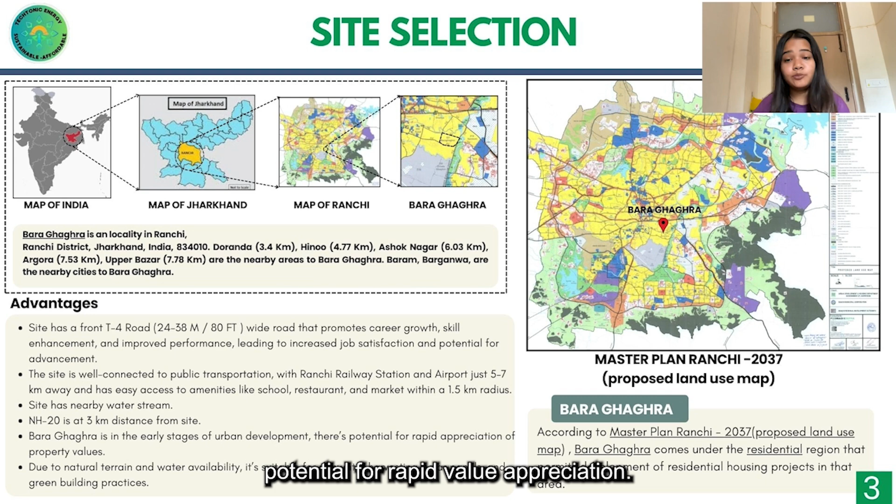While planning the community, we have also followed the bylaws of Jharkhand, ensuring that 35% of the housing is allocated to EWS, 15% to LIG, and the rest to MIG.

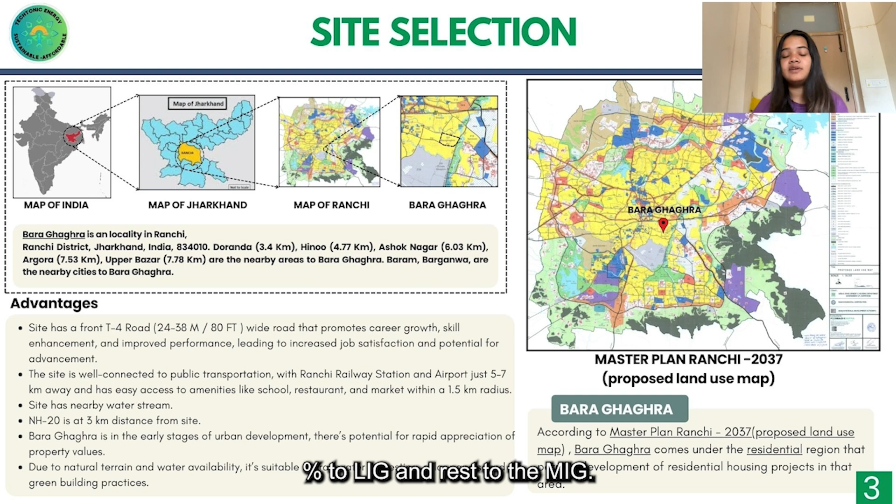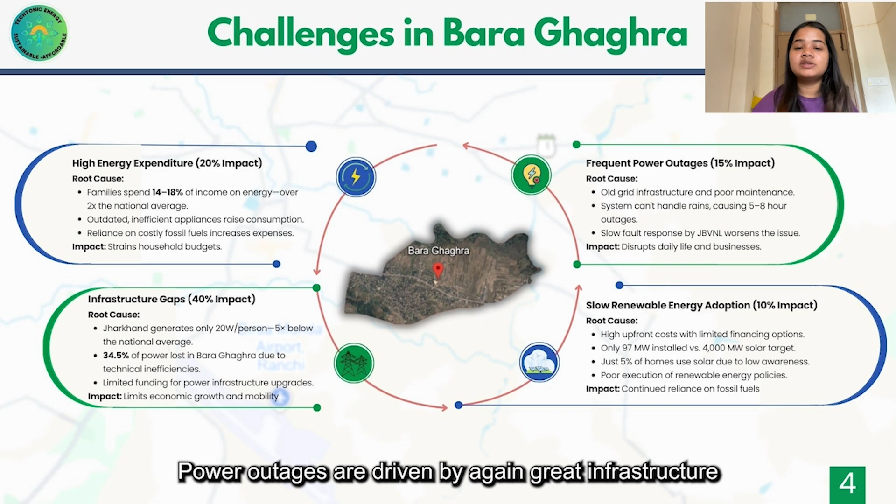Let's take a closer look at the major challenges in Bara Ghaghra. The challenges are high energy expenditure, with the root cause being inefficient energy usage and outdated appliances. Power outages are driven by grid infrastructure and technical faults. Infrastructure gaps are caused by low power generation and high transmission losses. Slow adoption of renewable resources is due to financing hurdles and weak execution.

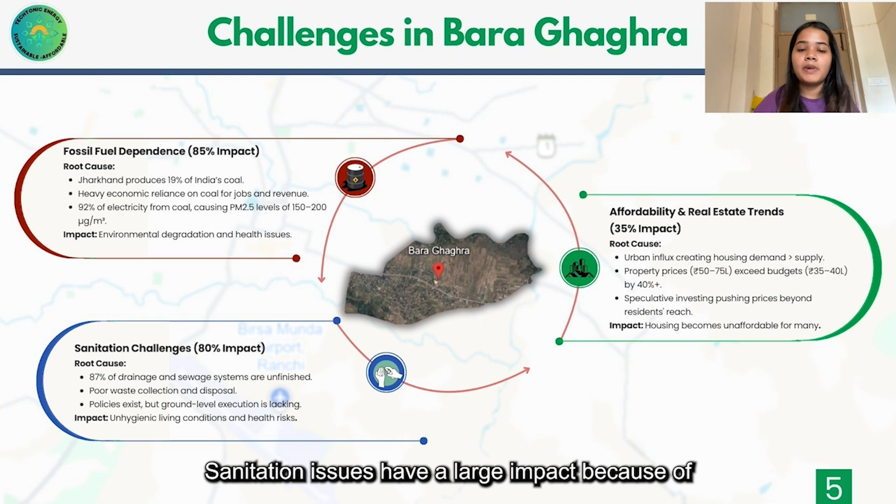Housing affordability and market trends are shaped by rapid urban growth and rising costs. Sanitation issues have a large impact because of incomplete infrastructure, poor waste systems, and failed implementation. Fossil fuel dependence remains high due to the country's coal reserves, economic reliance on them, and their environmental impact.

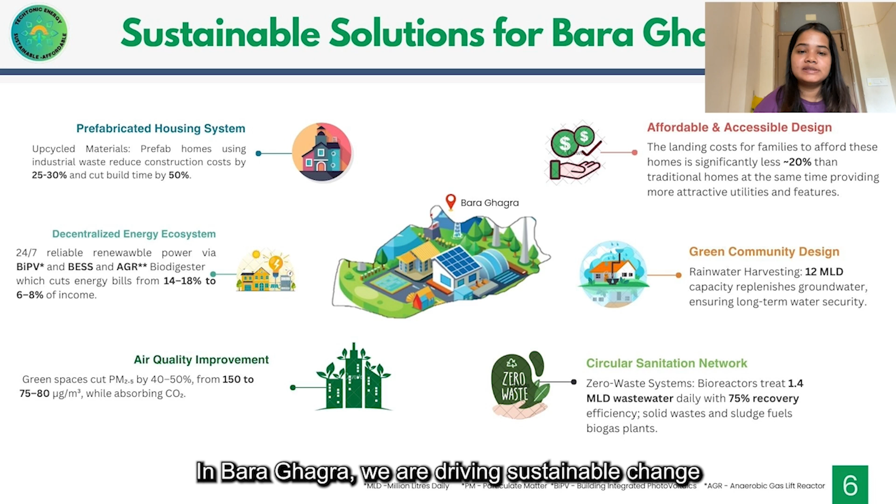In Bara Ghaghra, we are driving sustainable change with innovative solutions like prefabricated housing, affordable designing, decentralized energy system, water security, clean air, and circular sanitation.

Moving on, we have also conducted a participatory survey to understand the key needs and pain points of the people we aim to serve. Based on the insights gathered, we have identified and segmented the community into three consumer personas: EWS, LIG, and MIG. Through this division, we tailored specific solutions to meet the unique needs of each group, ensuring that their settlement requirements are addressed effectively.

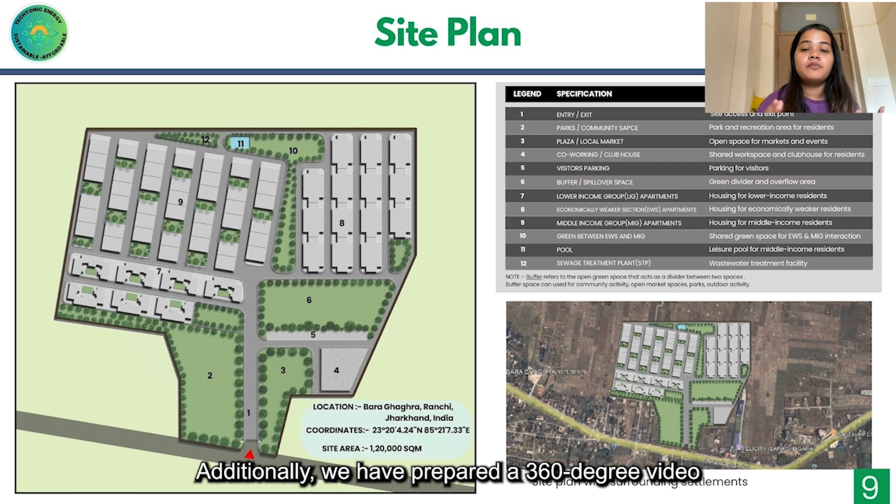Now, moving on to the site discussion. Here is the layout we have developed for our project. Additionally, we have prepared a 360-degree video to provide a comprehensive visual understanding of the site.

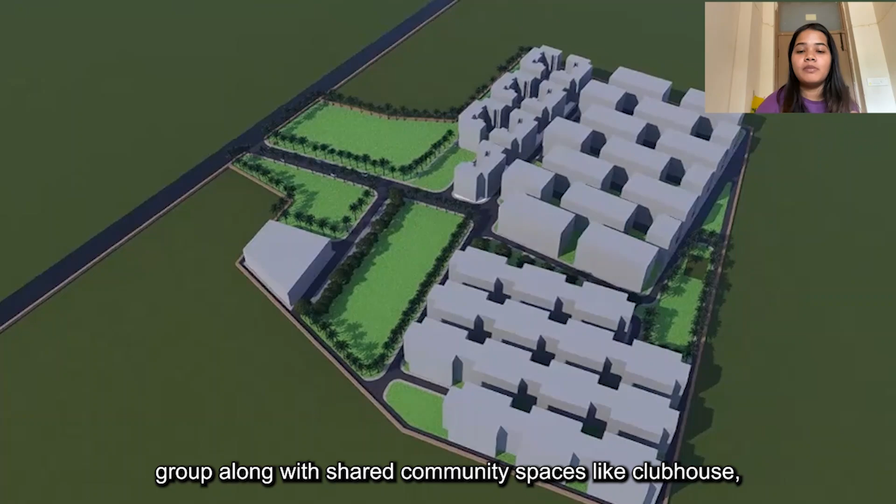In this video, as you can see, the layout includes different housing zones for each demographic group along with shared community spaces like clubhouse, local market plaza, parks to foster interaction and inclusivity, green buffers, visitor parking, and a wastewater treatment plant, ensuring both functionality and sustainability.

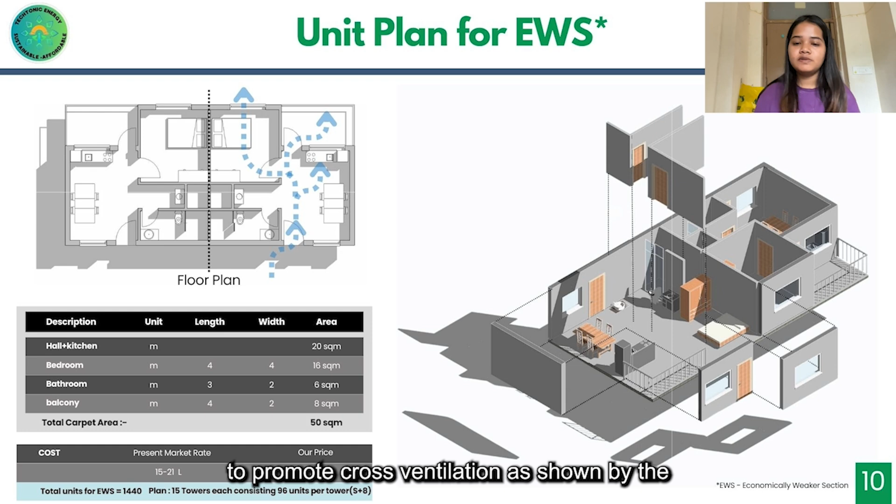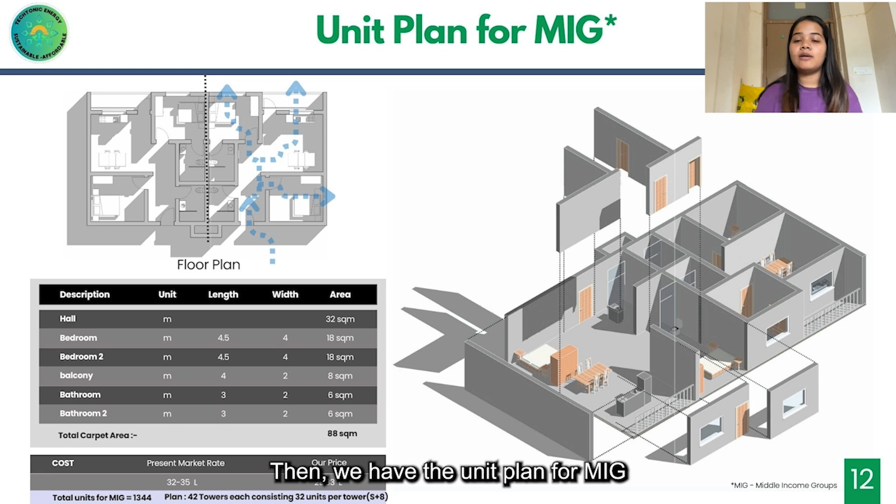Then we have the unit plan for LIG with a 1 BHK apartment but with a little more carpet area of 71 square meters. Then we have the unit plan for MIG with a 2 BHK apartment with a carpet area of 88 square meters.

Moving on to the next slide. Now, to ensure long-term sustainability, our first major step is building a smart integrated energy infrastructure for the community.

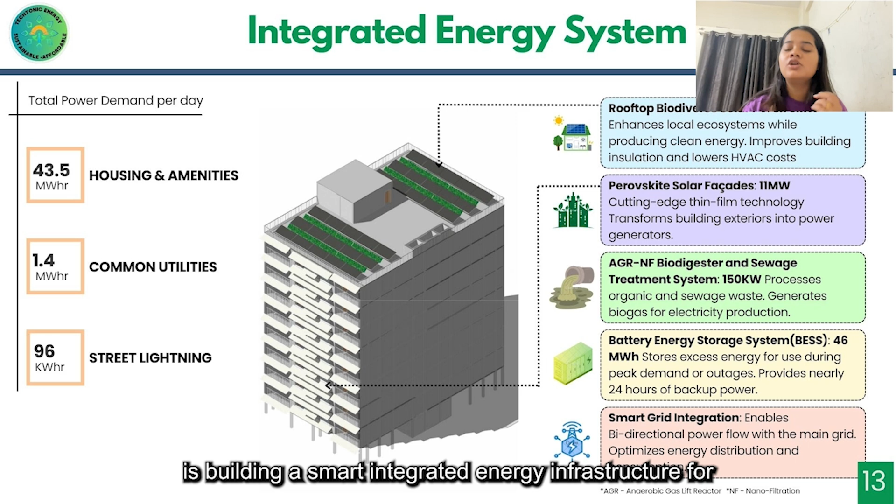Towards this step, we have incorporated a 3.75 megawatt rooftop biodiverse solar system with 11 megawatt of perovskite solar facade in the apartment, with AGR-NF biodigester to turn waste into biogas power. To enhance reliability, a 46 megawatt hour battery energy storage system stores excess energy.

To meet the community's daily sustainability needs, we have calculated a total power demand of 43.5 megawatt hour for housing and essential amenities, 1.4 megawatt hour for common utilities and services, and 96 kilowatt hour for street lighting.

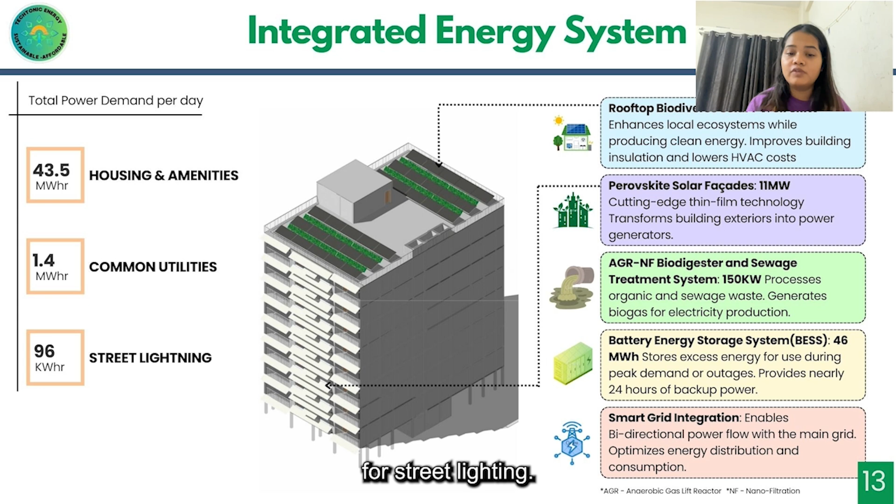Coming on to the next slide, since energy demand in Jharkhand is increasing by 5% annually, to further strengthen our community's energy resilience, we plan on harnessing future energy potential through two promising sources: coal bed methane and geothermal energy.

Jharkhand holds India's largest CBM reserve, making it a key player in the country's clean energy future. It offers lower emission, all-weather reliability and affordable energy, making it ideal for our needs.

We plan to integrate methane generators for disaster-ready backup and leverage CBM to supply 60% of electricity during monsoon, when solar output drops. In addition to CBM, we also see huge potential in geothermal energy, especially from the Surajkund region here in Jharkhand.

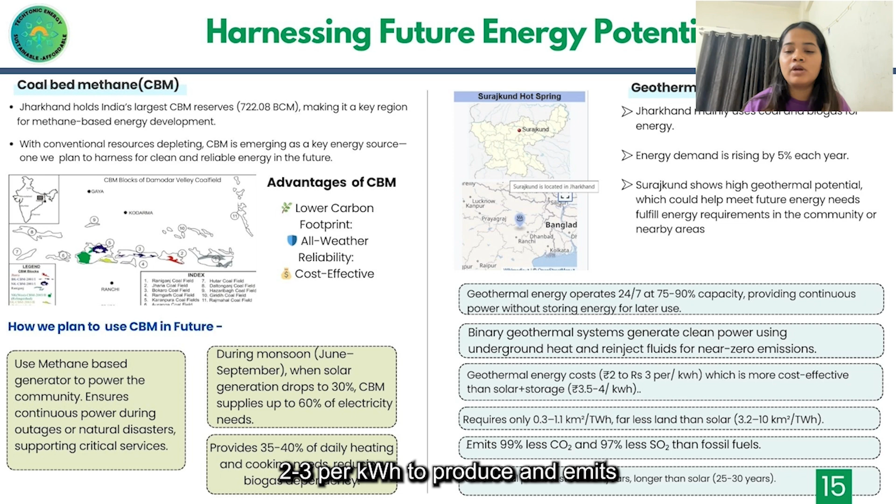Geothermal energy is a cleaner, constant power source that runs 24/7 up to 90% capacity with no storage needed. It also lasts 30 to 50 years, needs less land, costs just rupees 2 to 3 per kilowatt hour to produce, and emits 99% less CO2 than fossil fuels.

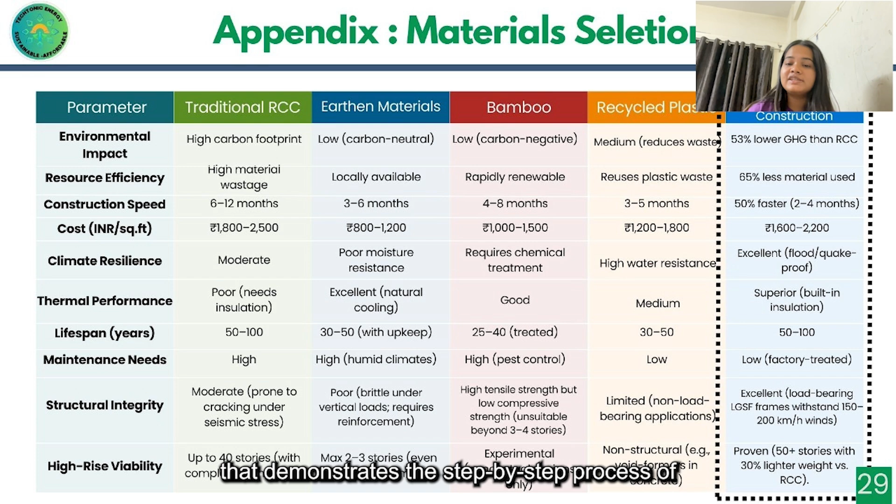Now, moving on to our next slide. After exploring various sustainable housing options, we chose prefabricated homes for their clear advantage. So now, we will be presenting a video that demonstrates the step-by-step process of how prefab homes are constructed.

This 3D volumetric concrete construction is the modern method of building by which solid precast concrete structural modules like room, toilet, kitchen, bathroom, stairs, etc., and any combination of these, are cast monolithically in a plant or casting yard under controlled conditions.

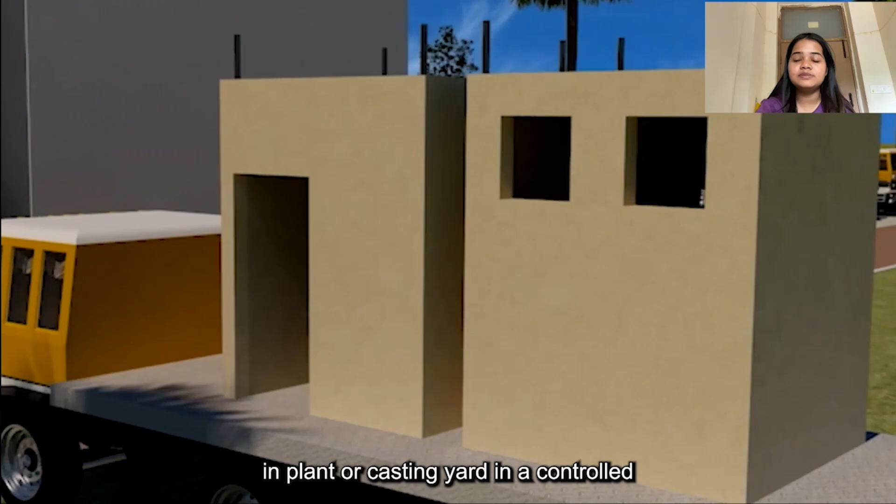These materials are then transferred by trucks and vehicles. Subject to the hoisting capacity, buildings of any height can be constructed using this technology system.

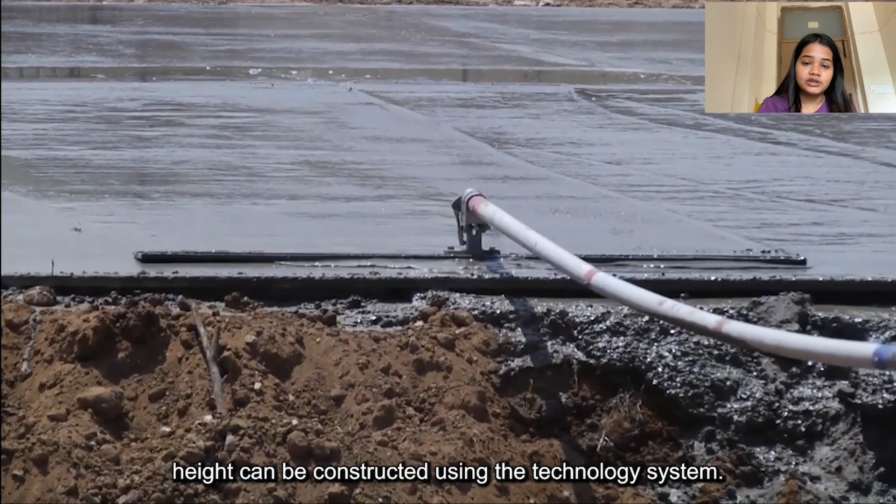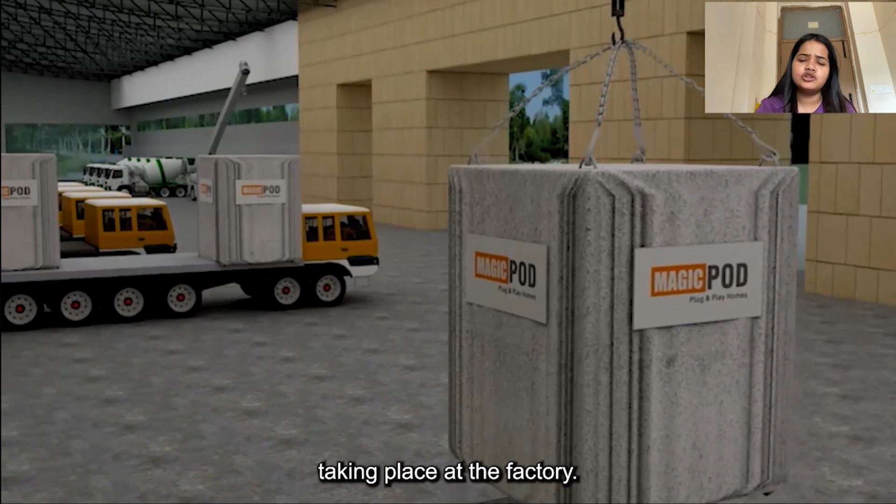Sequential construction in the project begins with keeping the design foundation of the building ready, while manufacturing of precast concrete structural modules takes place at the factory. Factory-finished rooms, toilets, kitchens, bathrooms, stairs, etc., are then installed on site with the help of tower cranes.

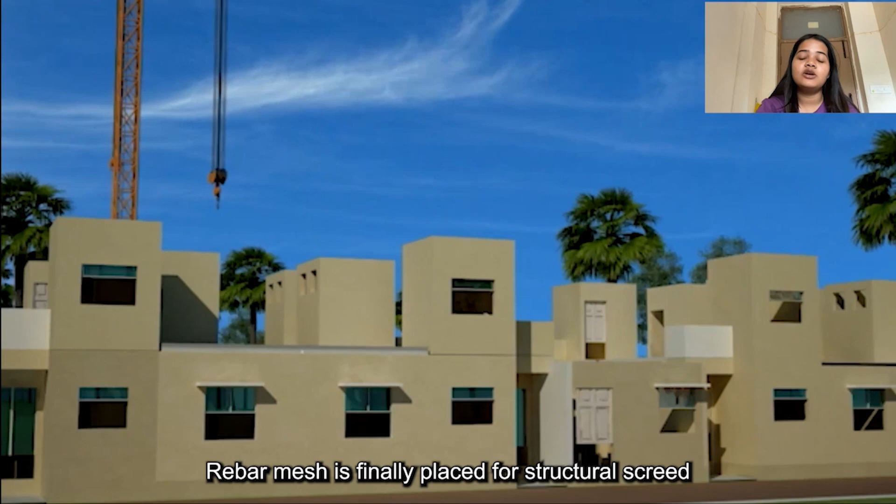Gable end walls are positioned to terminate the sides of the building. Pre-stressed slabs are then installed as flooring materials. Rebar mesh is finally placed for structural screed, connecting all the elements together. Consecutive floors are built in a similar manner to complete the structure.

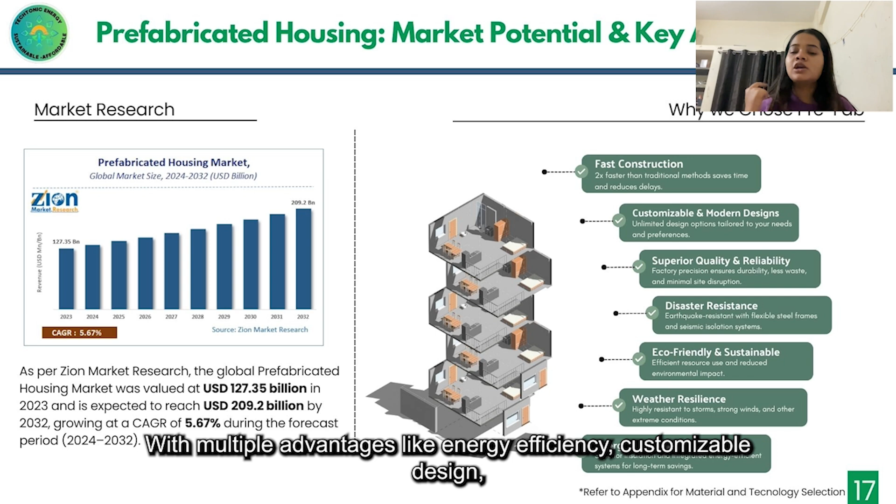This method offers multiple advantages like energy efficiency, customizable design, eco-friendliness and fast construction. Now coming to our next slide, which is about waste management and sanitation.

Each building in our community will be equipped with a smart chute system that will segregate waste into 4 streams: organic, sanitary, residual and recyclable material.

The organic waste will go into the anaerobic gas lift reactor, where it's co-digested along with sewage sludge to produce biogas at double the capacity for electricity generation. It would also produce 40 kg per day of nutrient-rich biomanure that supports urban green spaces.

The sewage will also be sent through nanofiltration units where 75% of water is recovered and 1.2 tons of CO2 emission is avoided daily. This system provides 1.05 million liters per day of potable water, which is reused for landscaping and cooling.

Now let's talk about our water management strategy, a key pillar in building a sustainable community.

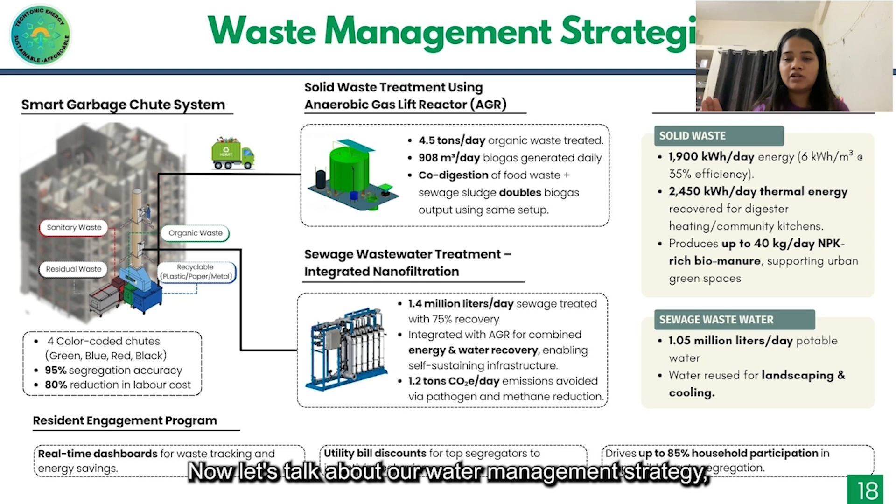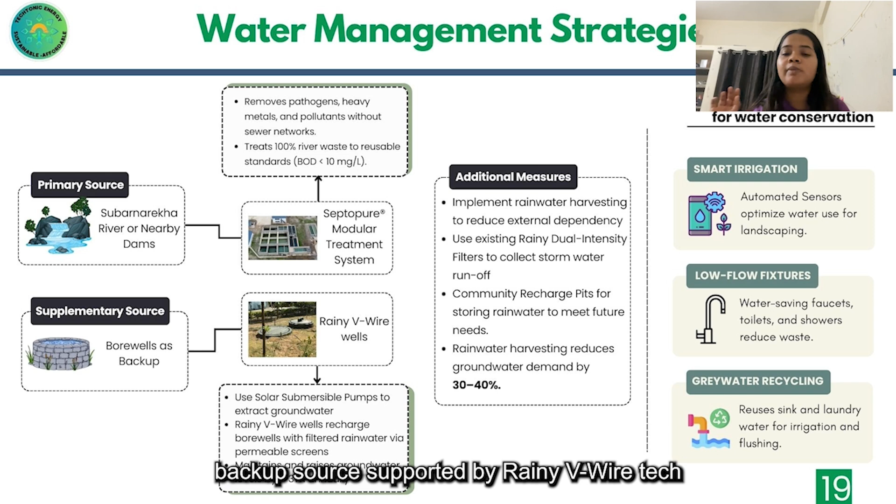Our primary source will be treated water from the Subarnarekha River or nearby dams, treated to make the water safe and usable. We plan to use borewells as a supplementary backup source, supported by rainy V-wire tech and solar submersible pumps, ensuring groundwater remains stable.

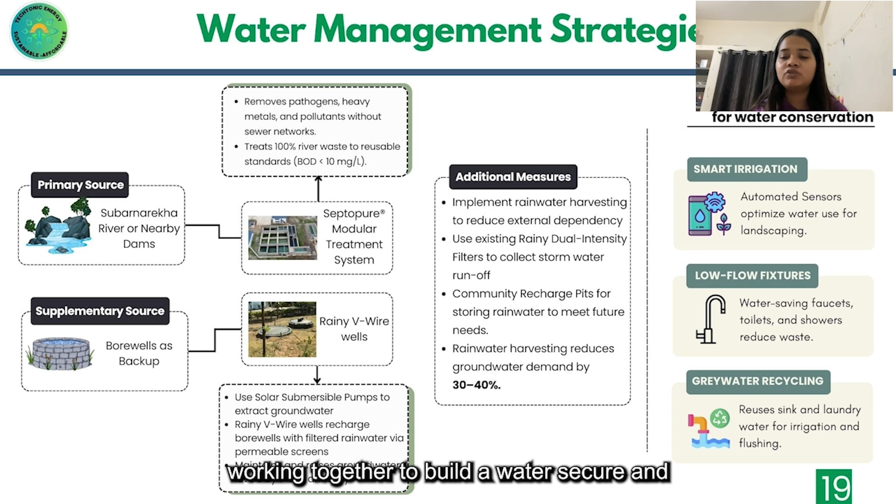For efficiency, we will deploy smart irrigation sensors, low flow fixtures and greywater recycling, all working together to build a water-secure and eco-friendly future for our community.

Coming on to the next slide, which is about the V-wire technology, which serves a dual purpose for rainwater harvesting as well as groundwater recharge.

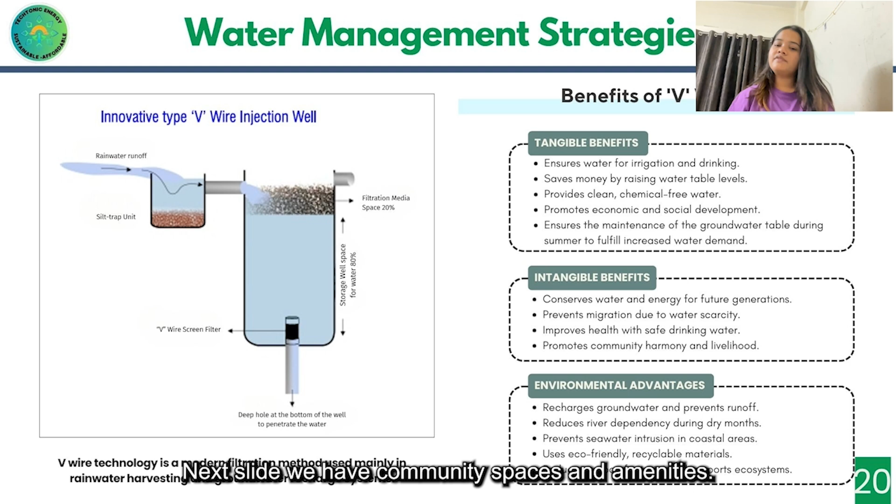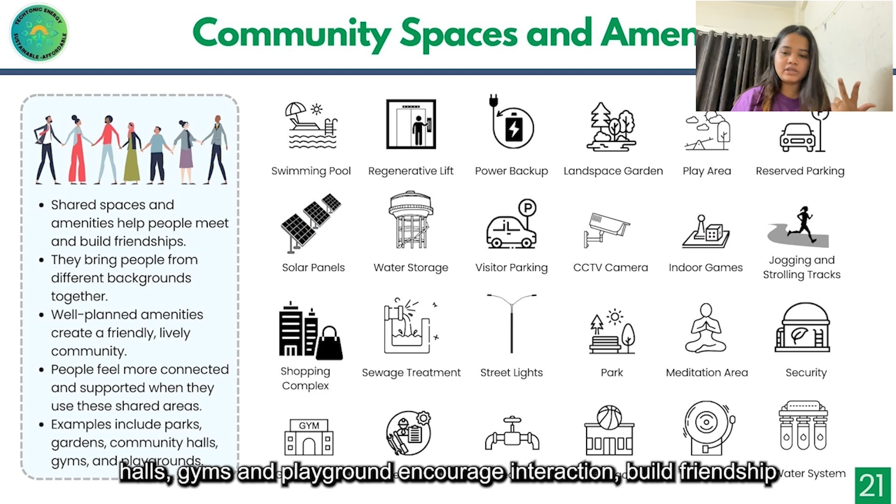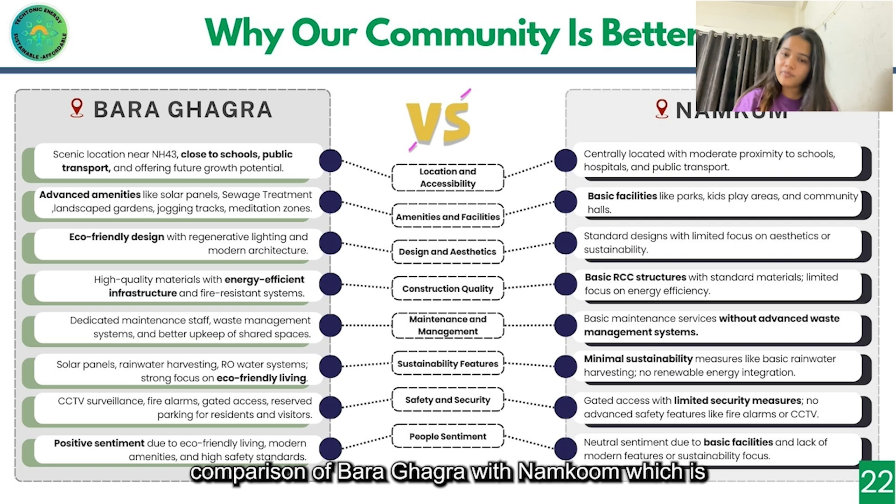Next, we have community spaces and amenities. Why is this space so important in a community? Because it helps bring people together. Well-designed shared areas like parks, gardens, community halls, gyms, and playgrounds encourage interaction, build friendship, and foster a sense of belonging within the community.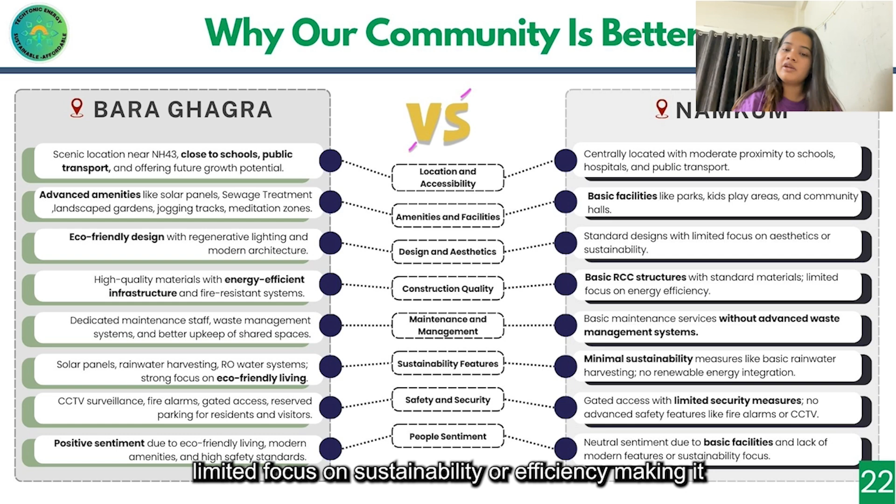Next, we have presented a side-by-side comparison of Bara Ghagra with Namkum, a nearby community. Bara Ghagra offers eco-friendly designs and modern, energy-efficient, fire-resistant structures, whereas Namkum uses basic RCC structures with limited focus on sustainability or efficiency, making it difficult for people to live in such a community.

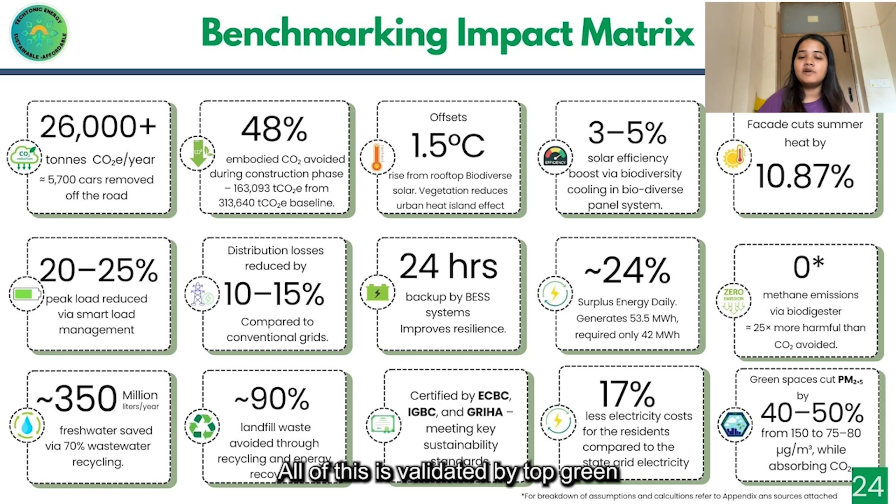Waste and water management are equally strong. 70% of wastewater is recycled, saving 350 million liters of fresh water yearly, while 90% of landfill waste is diverted through recovery and recycling. All of this is validated by top green certifications like ECBC, IGBC, and GRIHA, ensuring national compliance and excellence.

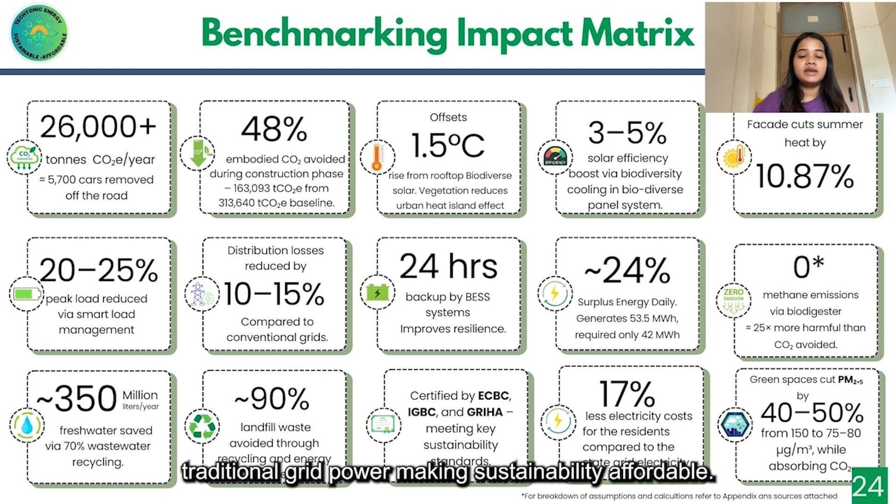And finally, for the people we serve, our model delivers 17% lower electricity costs than traditional grid power, making sustainability affordable. Now that we have covered our financial strategy and its measurable impact, let's move to the actual roadmap, the implementation timeline.

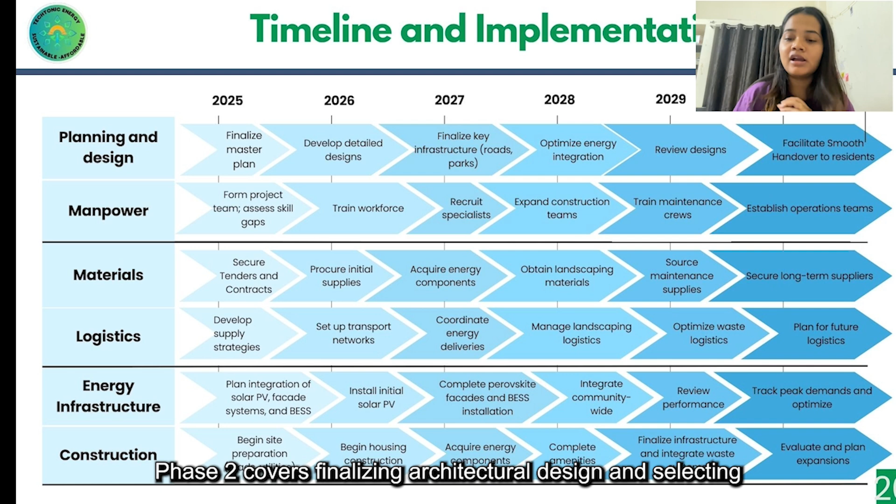This plan is structured in 4 well-defined phases. Phase 1 focuses on land survey, soil testing, and securing necessary approvals and funding. Phase 2 covers finalizing architectural design and selecting builders through tenders. Phase 3 starts with land preparation for infrastructure, followed by staged development of homes and public facilities. Phase 4 concludes the project with home handovers, service setup, and formation of a residents association for long-term governance.

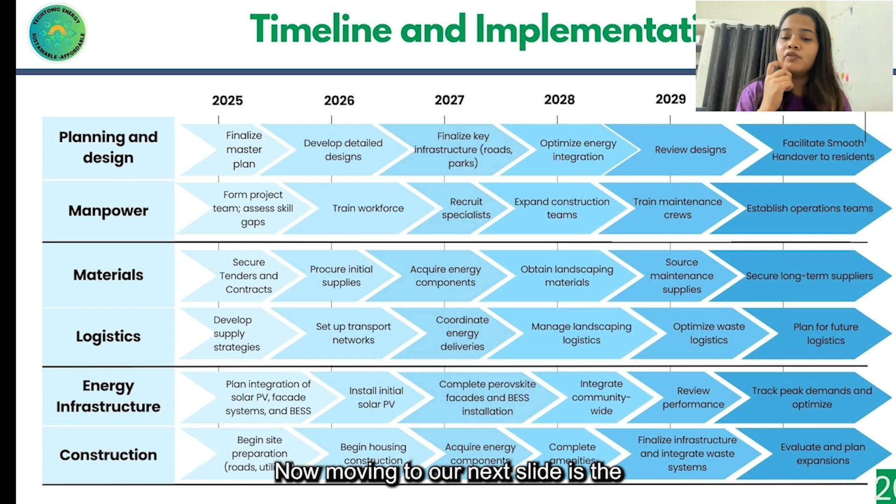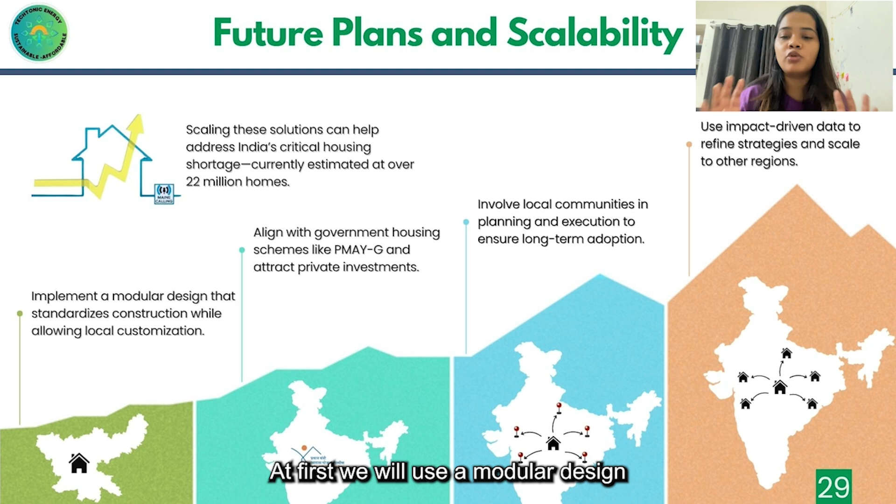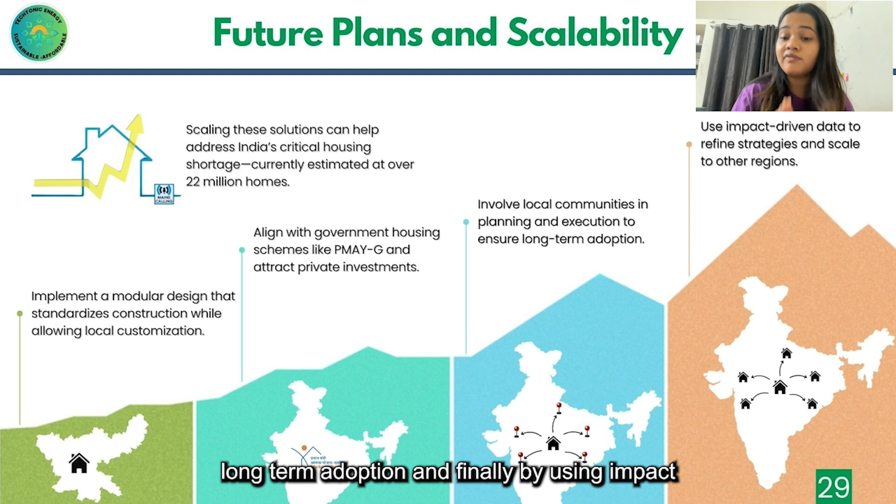Now let us talk about future plans and scalability. First, we will use a modular design for standardized yet customizable construction, aligning with PMAY and attracting private investment for expansion. Then we would engage local community in planning to ensure long-term adoption, and finally, using impact-driven data, we can refine and scale our approach to other regions.

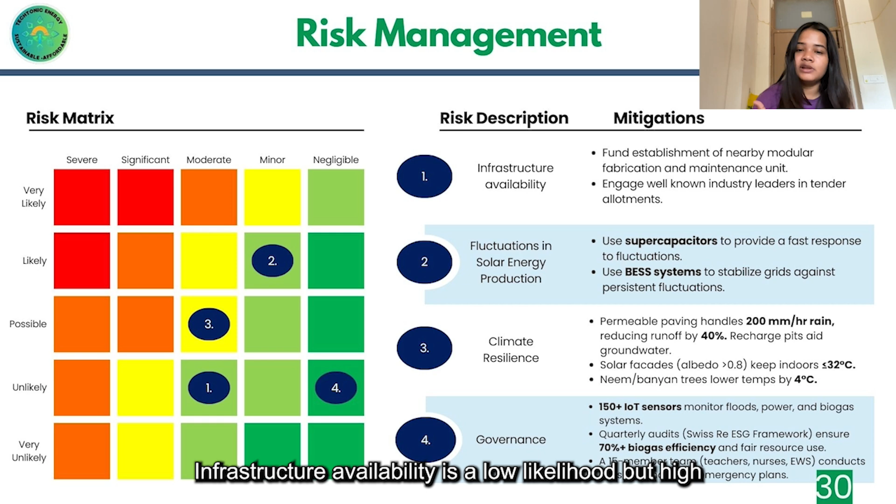Infrastructure availability is a low likelihood but high impact risk, whereas fluctuation in solar energy is a medium level risk. Climate resilience is a moderate impact and possible risk, whereas governance is a low risk.